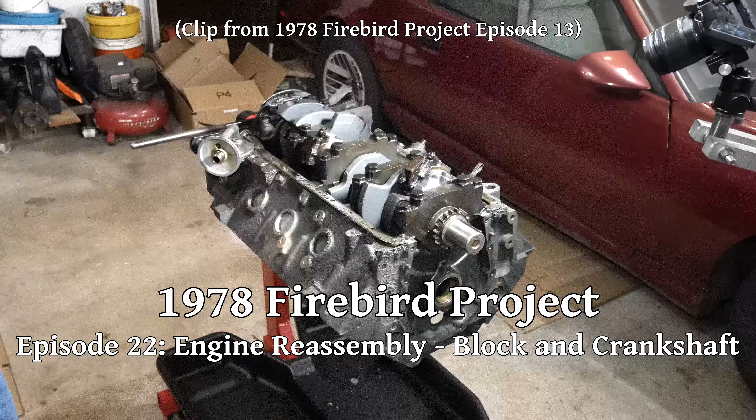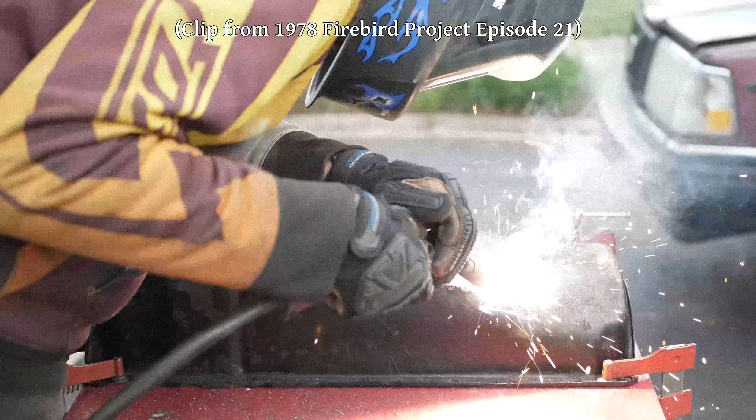This, incredibly, is the 10th episode of this 454 engine rebuild. Everything has been torn down, cleaned up, and the important parts have been gathered, so it's finally time to put the engine back together. Most of the parts are coming from an engine rebuild kit made by Engine Tech. This has new crank and rod bearings, piston rings, and most of the gaskets and seals we'll need.

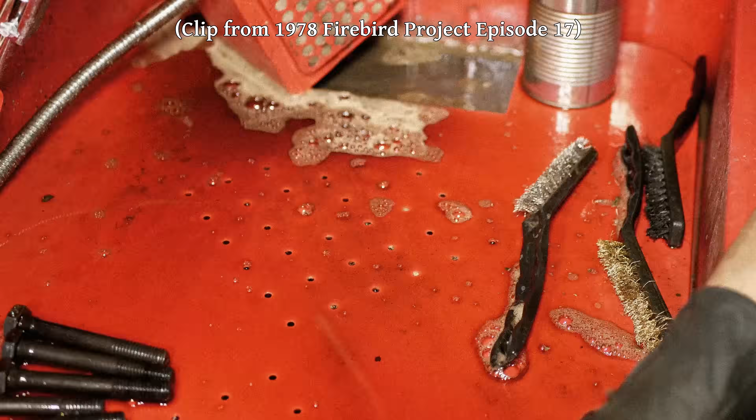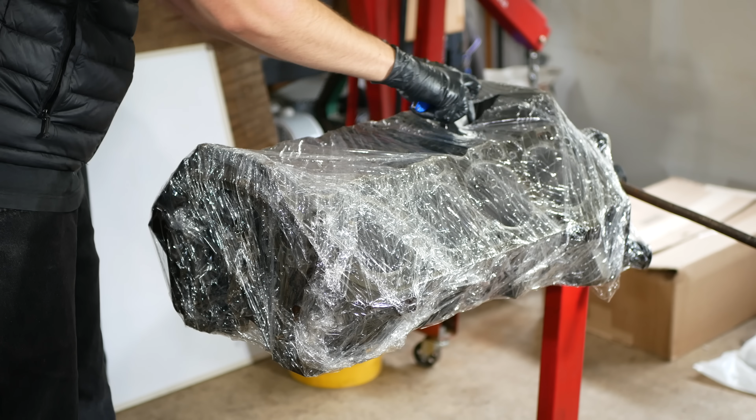And even though we cleaned a lot of the old ones, we still needed more bolts. So I ordered, well, a bunch, and it was not the last order that this project needed. We also have a handful of parts like a new timing set, oil pump, and cam and lifters. And with all of that on hand, let's unwrap the engine block and get to work.

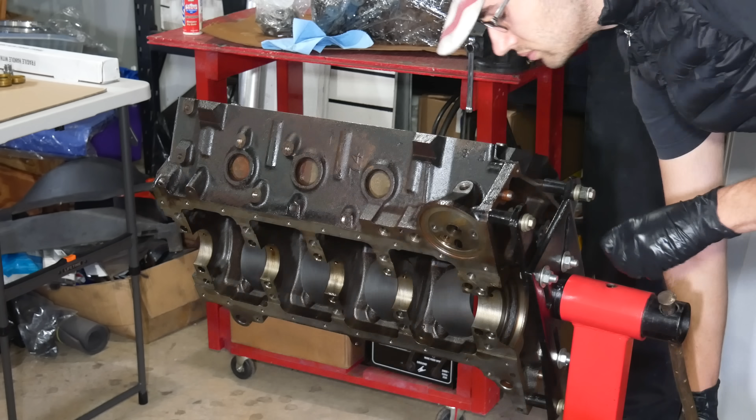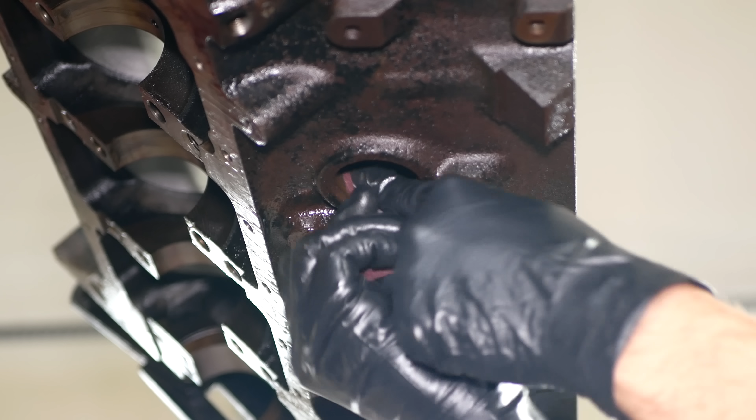The first thing we'll be doing is installing a set of new core plugs. And to do that, we'll rotate the engine so the ports for the first ones we'll be working with are facing down. But why? Well, I probably should have done this before washing the block, but we need to clean up the edges of the holes for the core plugs before installing the new ones. And I figured that in order to keep as many of those abrasive particles as possible out of the engine, if we just face the ports down, hopefully the particles will just fall back out.

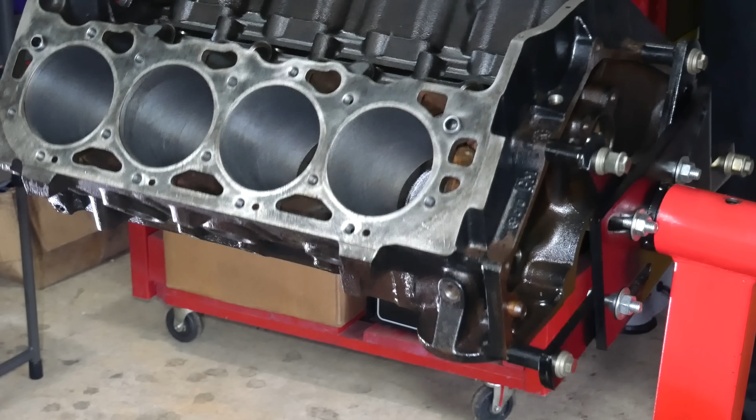There wasn't much rust or scale buildup on these at all, so some red Scotch-Brite should clean them up just fine. After that scuffing, we'll make sure to thoroughly clean them. And with that done, we can flip the engine onto its side where we can more comfortably install new plugs. Because I decided to use some sealer on the plugs, we want these ports free of oil, and some acetone on a shop towel will do that just fine.

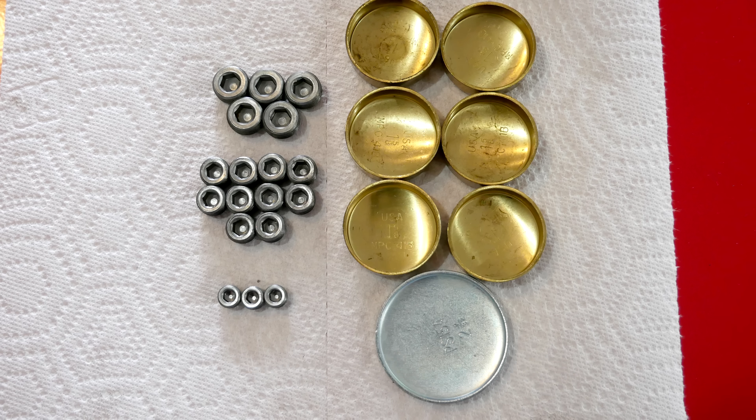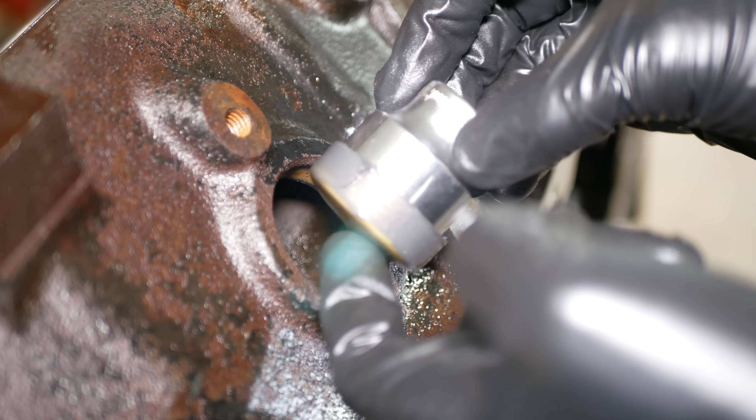We'll be installing a set of brass core plugs because I greatly prefer them to their steel counterparts. I really don't think sealer on these is necessary, but I figured it was kind of a might as well situation. We'll be applying just a little bit of regular old RTV to the plugs, and we'll set the first one in place. To punch them into the block, we'll just be using a socket, this one happens to be 1 1/8", and an extension to hammer them in.

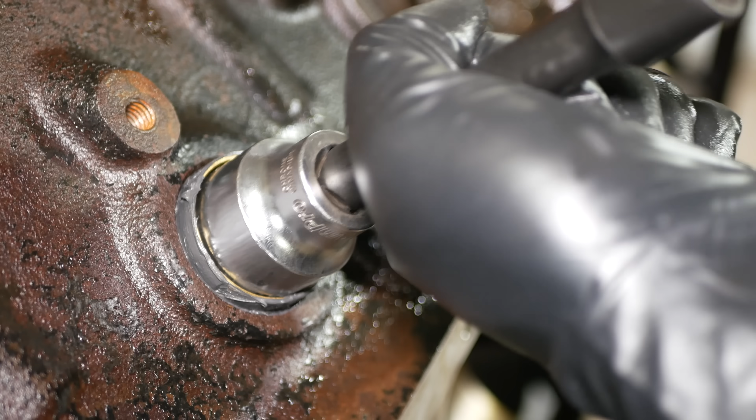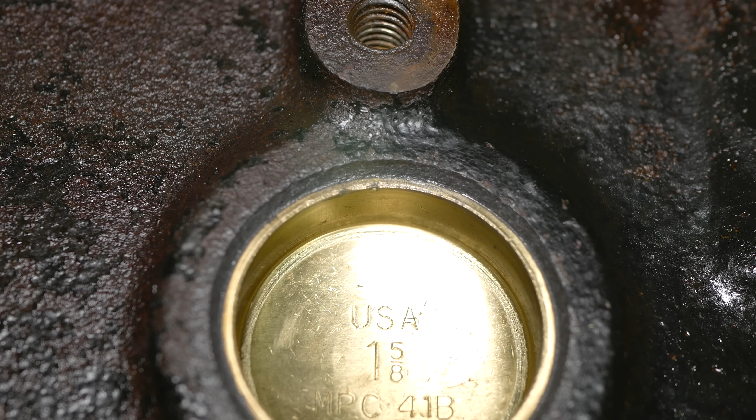The plugs need to go in straight, with the outer edge even and level all the way around. We'll set the depth of the plug to be even with the lower edge of the bevel in the engine block. And once it's fully installed, we'll carefully clean up any excess RTV on the outside of the block, mostly because it'll make the paint adhere to everything better later. We can double check that the depth is correct by peeking through the coolant port on the deck surface, and luckily that installed plug looks perfect.

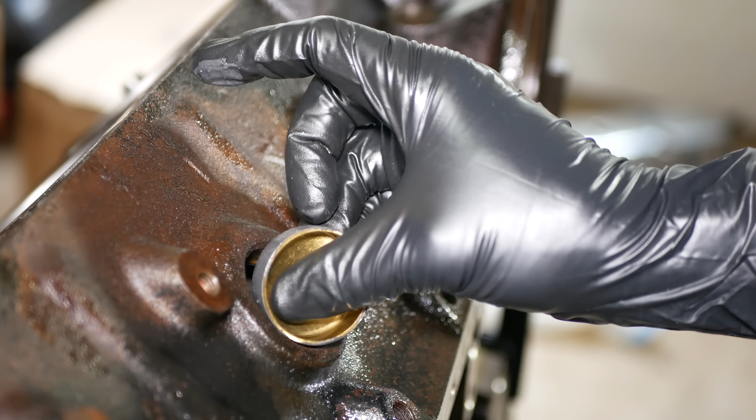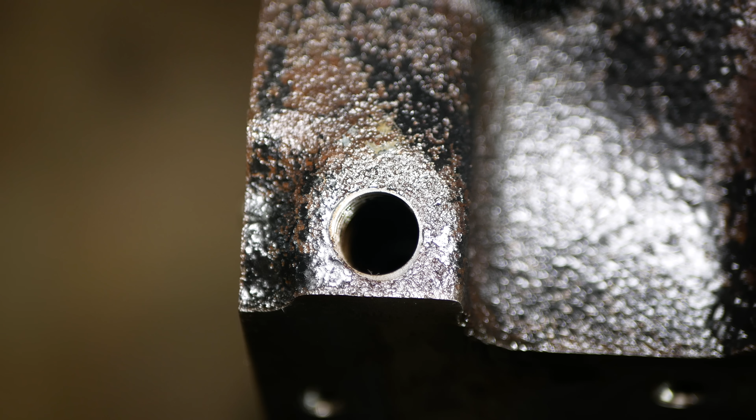So we'll keep moving on along, and the second plug on the driver's side will get installed in the same way. And after that comes the third. Those three are looking perfect. We'll use more acetone to wipe down the outer edges one more time in an effort to remove any remaining RTV. Then, while we're here, we'll take care of a few threaded plugs on the same side of the engine block.

The core plug set also included these new threaded plugs, which is what we'll be applying thread sealer to and installing. This first one will seal off the oil gallery all the way at the front of the block. We'll be tightening these NPT plugs by feel and kind of trying to align them in an aesthetically pleasing way. Once that's nice and tight, we'll wipe off the excess thread sealer and move to the next one.

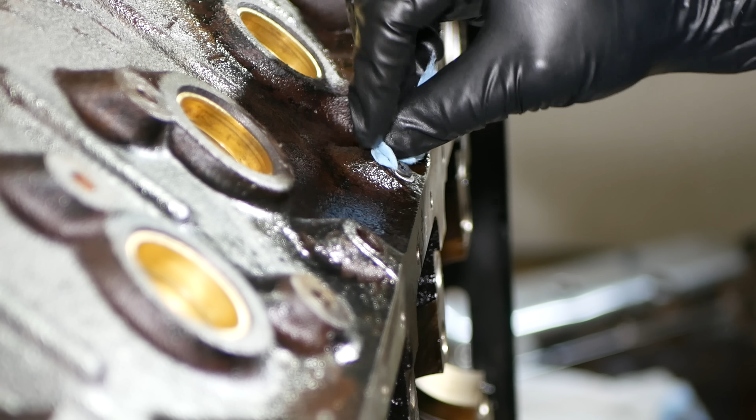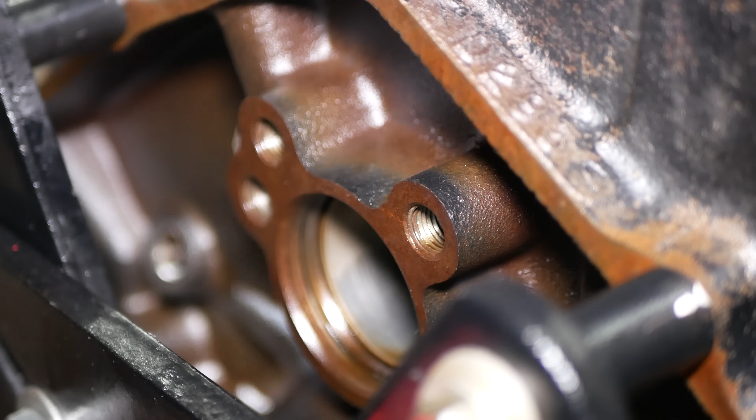This plug seals off the water jacket and doubles as a coolant drain for the block. With that installed, next is this threaded port right above the mounting pad for the oil filter. And that about covers the driver's side of the block. We'll rotate it once more and move to the rear. First, we need to install and tighten down plugs into the 3 ports above the cam tunnel. 2 of these feed the lifters and 1 feeds the cam bearings.

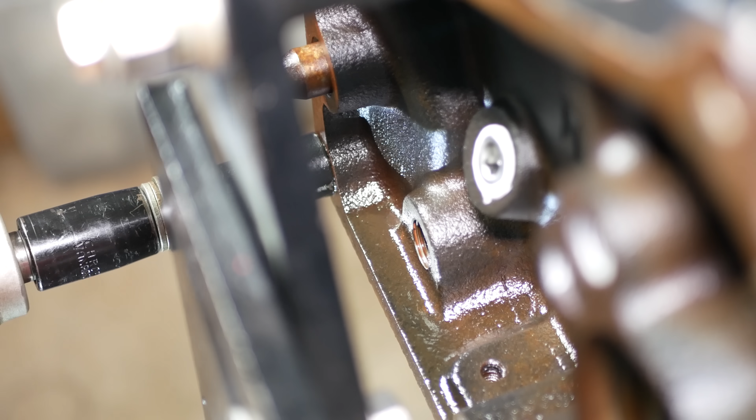We'll be able to see this better with the front plugs, but when installing plugs like these, you need to make sure that they won't tighten down too far and block any important ports. In this case, none of them are interfering with anything, so we're free to get them nice and snug. And once those are in place, we'll also cap off the 2 ports at the lower driver's side. In order to get the socket onto this lower plug, we need to loosen and swing out of the way one of the arms on the engine stand.

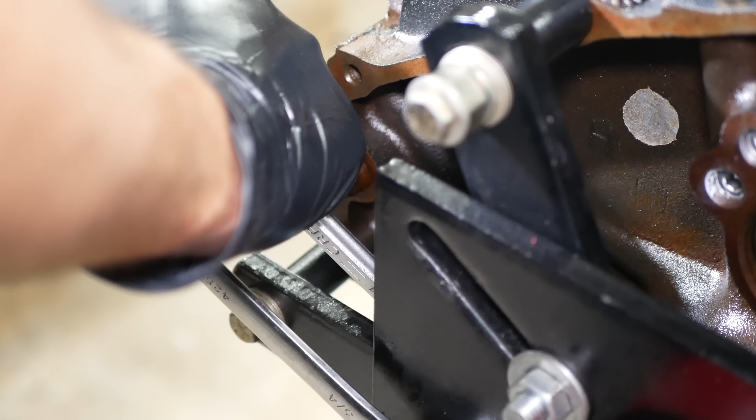Generally speaking, 3 out of 4 is still plenty to hold up an engine, but make sure the others are very tight and be careful if you have to do something like this. In our case, it didn't present any problems and gave the clearance that was needed to install that plug. And with that in place, we'll reinstall the arm for the engine stand, and there's just one more threaded port towards the rear of the block, this upper one which typically feeds an oil pressure sender or switch.

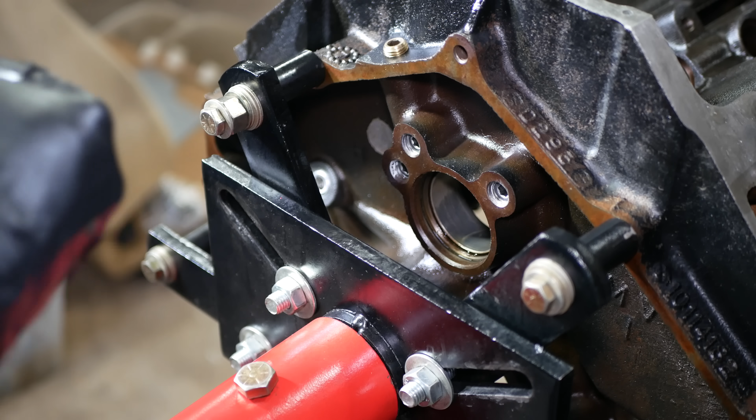We'll be using this port with a mechanical gauge during testing, so we won't be installing any sealer and we'll just install a temporary plug. With that, there's just one more plug to install at the rear of the engine block, and that's the large steel one that blocks off the camshaft tunnel.

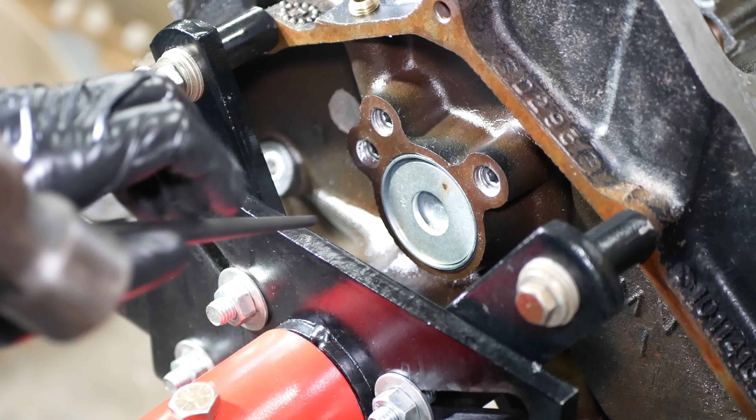Because of the block's positioning on the engine stand and my lazy unwillingness to remove it from the stand, installing this one will be a bit awkward. We'll protect the plug with a large flat steel washer and use a large punch to hammer it in. By continually moving our point of impact, we'll make sure the plug gets pushed in straight.

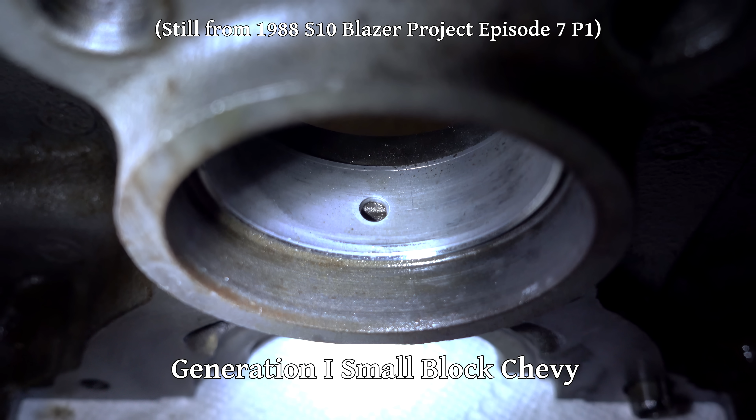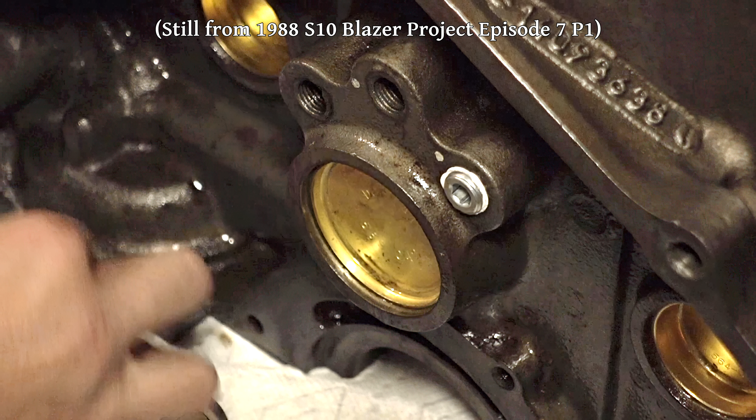This Gen 1 block has a little shoulder right behind the cam bearing, which is not something seen on earlier models. Because of that, I'm honestly not sure if it's possible to install this plug too far on this particular engine, and the factory installed plug was at least pushed in 1/8 of an inch past the bevel, but to stay on the safe side, it would probably be for the best to push the plug just as far in as you have to get it fully seated.

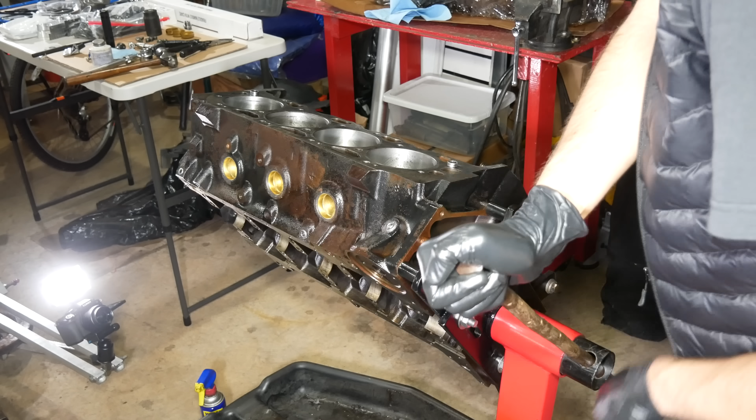I decided to install the plug similarly to the factory one, and once that looks about right, we'll flip the engine over once again and work on the core plugs on the passenger side. We'll face the 3 large ports down, just like on the other side, to clean them up. They'll get the same red Scotch-Brite treatment, and then, when the engine is flipped upwards, an acetone wash.

Then we'll give the first plug a light coating of RTV and knock it into place. Then the second, and the third. And with those looking just right, we have one threaded plug on this side into a coolant passage. And with that tidied up, this side is done, so we'll flip the engine back upright and move to the front.

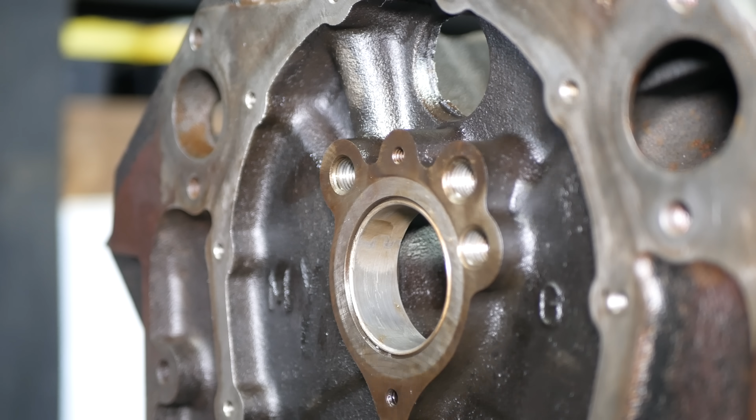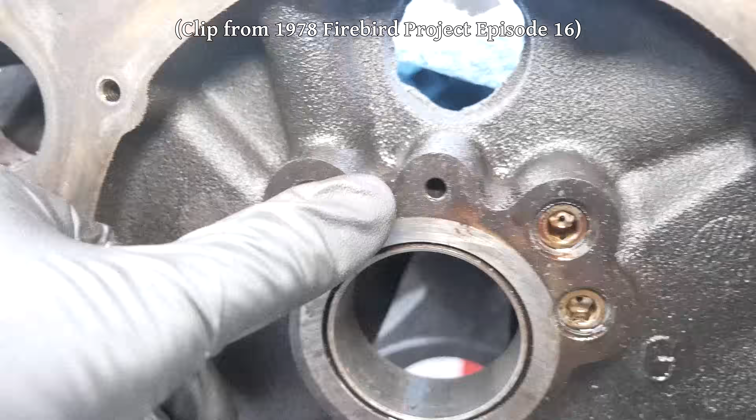Just like we did at the rear of the engine, the 3 ports around the cam tunnel at the front will need plugs. This was talked about when taking the engine apart, so I won't belabor the point, but the plugs we'll be installing are solid ones. The plugs that came in this engine are drilled down the center to help prevent noisy valve train startups by evacuating air. They also provide additional lubrication for the timing chain.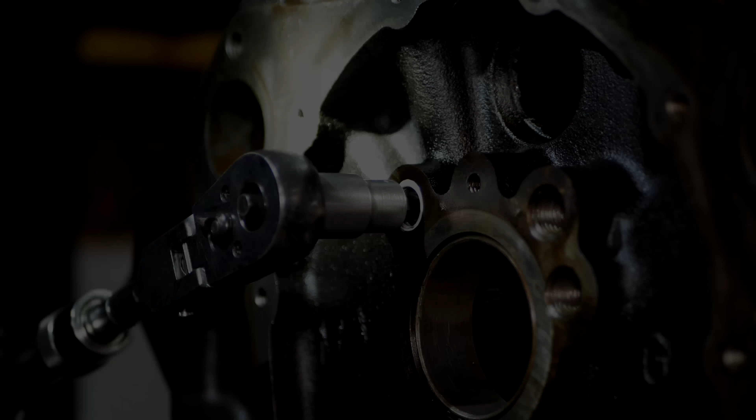I ended up going with regular old solid plugs because that's what the new kit came with, and I may have lost the old ones, but let's not dwell on that. Older engines didn't have drilled plugs, and it doesn't seem like something I need to be too concerned about, so we're just gonna stick with the solid ones.

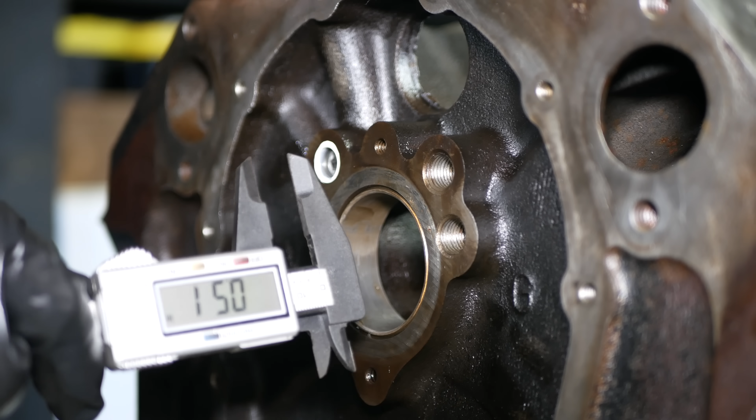At the front here, we'll also take a better look than we could at the rear at the cam bearing oil passage. Here you can see how the port for that front cam bearing is in the threaded section of this gallery. This is why you need to be careful which depth the plugs are installed to. The best way to check for this is to measure the depth of that port, the thickness of the plug, and then measure the plug's depth once installed.

In this case, that oiling port was about 1/2 inch from the front of the block. After calculating for the plug thickness at the base of the hex, that first installed plug is blocking threads all the way down to 0.52 inches. And once the other 2 are installed, they check out about the same. That depth means that the plug is up against the port but shouldn't be blocking it.

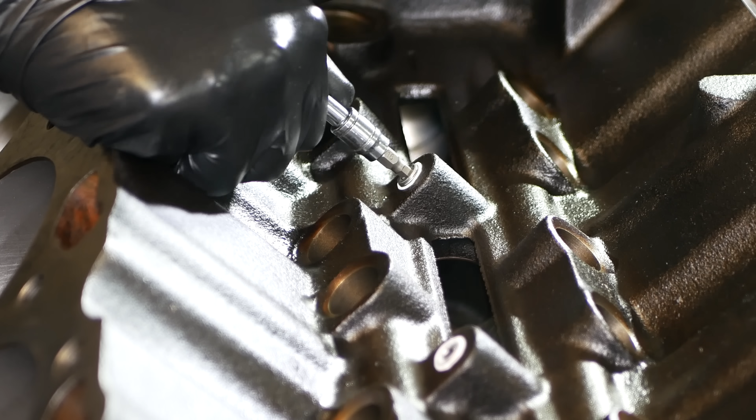And with those sorted out, we can move to a few plugs in the intake valley. This trio of 1/8 inch NPT plugs seals passages that had to be drilled down to those center cam bearings to feed them. So we'll make sure to get each of the 3 tightened down with care, and we'll flip the block totally over to work on the base of it.

First, we'll thread plugs into these 2 ports, which would normally be used for an external oil cooler. We won't be running one of those, so we'll just block them off. And there's a little side note about that that only occurred to me after putting the engine together, so it's something we'll have to take care of in the future.

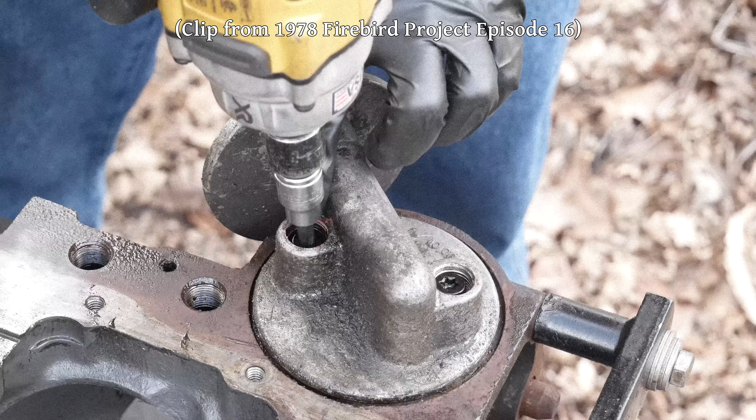Back in the engine block disassembly video, we showed that there were 2 oil pressure relief valves built into the filter mounting pad. The valve offset from the center will keep oil flowing in the case of a clogged oil filter, and this valve in the center is the oil cooler bypass.

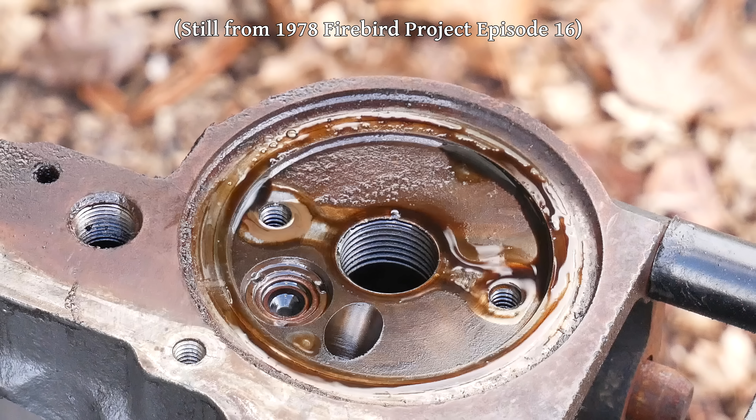Since we just plugged the ports for the oil cooler, that means all of the oil flowing through the engine will be going through this valve. And it's not necessarily the biggest problem, but it's not doing us any favors, and it's an additional element of complexity in the system. Before starting the engine, we will circle back to remove that valve, but for now we'll just continue with chronological engine assembly, and the next thing we'll do is install the oil filter adapter.

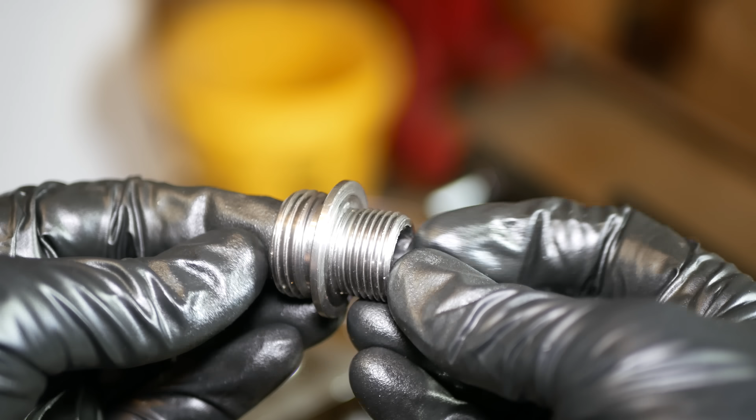This engine came with an offset adapter to help oil filter clearance around some components that we won't have to worry about. So instead we'll be using this standard style of oil filter adapter that just allows a filter to be screwed straight onto the block. It's probably unnecessary, but we'll put some thread sealer on that and use a hex socket on the inner diameter to tighten it into the block. I wasn't able to find a torque spec for this, so we'll just get it tight.

That covers all of the plugs and that adapter, and we're finally ready to move to some of the bigger parts. Before we get any farther, we'll use some more acetone to thoroughly clean all of the cylinder walls. This always manages to get even more out of cylinders that were already looking pretty good. We'll run a shop towel around each cylinder until it comes out clean. Obviously, we don't want any grit in there for when the pistons go in, but before we get to that, we're going to be doing some measuring, so we want the cylinders as clean as can be.

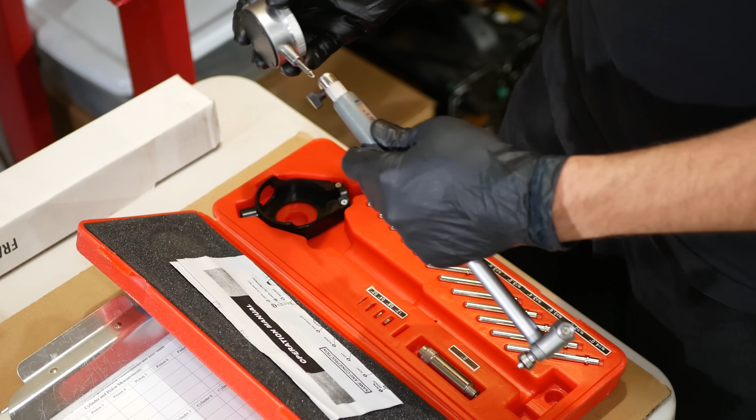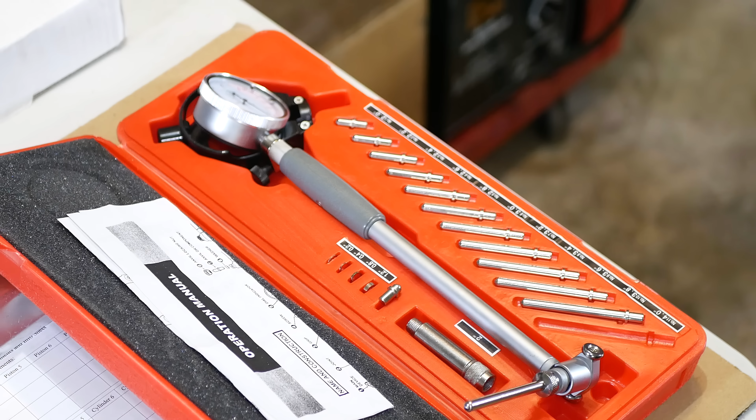To help keep this data organized, I made these printouts specifically for this engine with data separated into a few different tables. To help us fill those out, I bought this tool, a dial bore gauge. We'll be able to use this to get some accurate dimensional data about the cylinder walls. Normally this is something you would do before you're actually assembling the engine, but in this case, I wasn't really gonna do anything about this data unless it was way bad. This is more something I wanted as a curiosity to see exactly how bad the cylinder walls ended up after all of that honing.

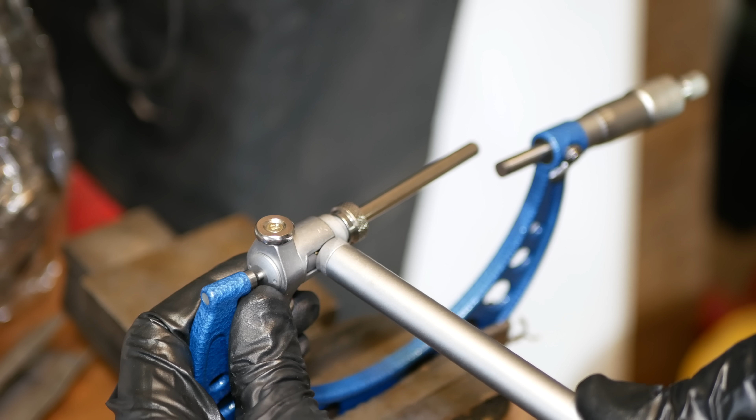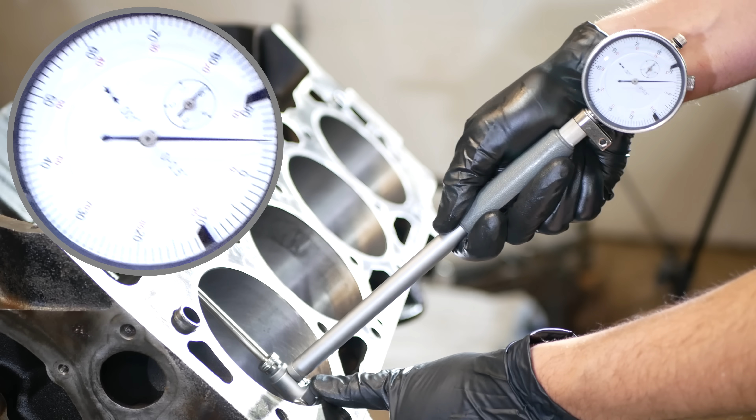To take a reading with that dial bore gauge, we first need to set it up using a micrometer. This one is lightly clamped in a vise and locked at the measurement of 4.250 inches, which should be the starting point for the inner diameter of the cylinders. We'll zero out the gauge to the micrometer, which means its 0 represents 4.250 inches. With it set up, we can carefully insert the gauge into a cylinder and take an accurate reading of its diameter at one location. Here we're measuring towards the top of cylinder number 1. By rocking the gauge back and forth, we'll look for the lowest reading, which represents the actual diameter at that point. That measurement in the direction of piston travel came out to 4.254 inches.

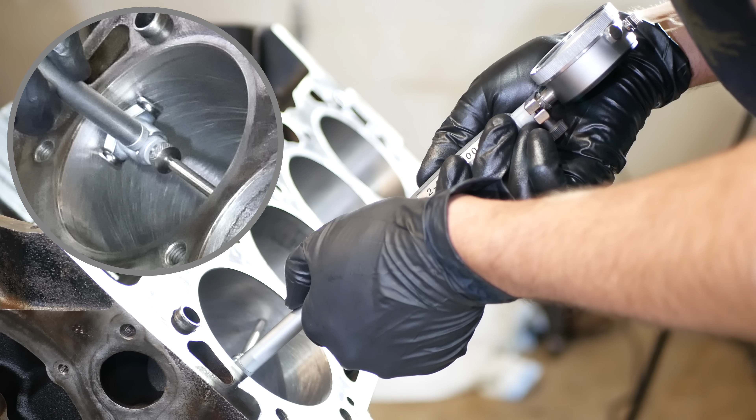And if we measure perpendicular to that, where there's usually a little bit less wear, we come out with 4.252 inches. Then we'll once again measure in line with the piston travel, but this time towards the bottom of the cylinder. Typically, this wears less than the top of the cylinder and came out to 4.252 inches. Perpendicular to that, it measured at 4.251 inches. That covers one cylinder, but of course there are a few more. We'll measure each and every cylinder in that engine block the same way we just showed measuring cylinder number 1. The numbers turned out pretty much as expected, and we'll go over those in just a minute.

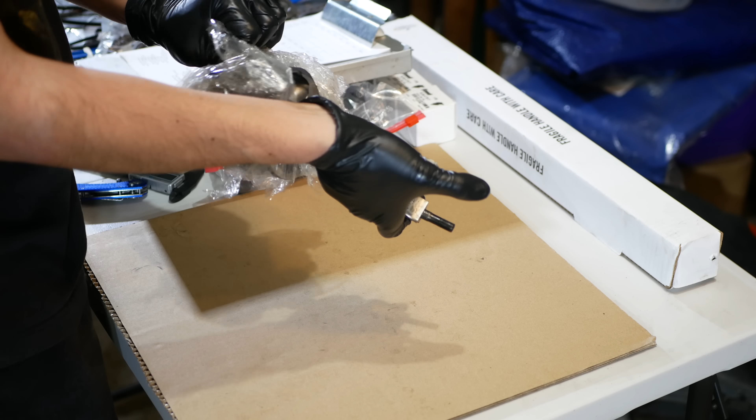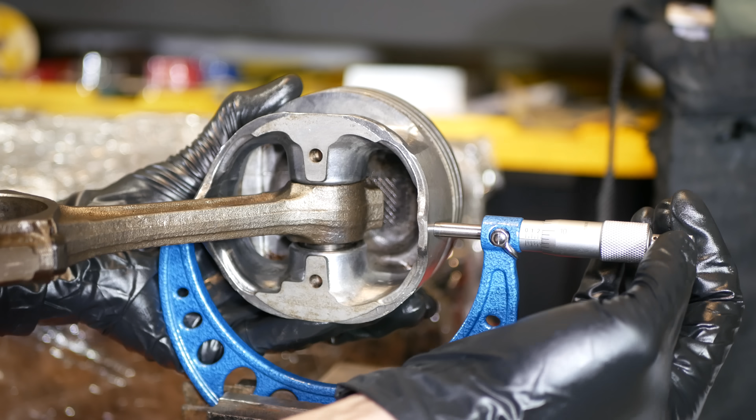But what are they actually telling us about this engine? Well, there's one more thing I want to do before we talk about that, and that's measuring the pistons themselves. Let's go ahead and unpack those and lay them all out on the table. We'll take the piston from cylinder number 1 and use that same micrometer to measure the skirt diameter. Typically, the widest part of the piston is the base of the skirt, and we see that here with it measuring 4.248 inches. In fact, we measured all of the pistons and they all came out to that same number. So now that we have that in addition to the cylinder measurements, let's look at the numbers for a second.

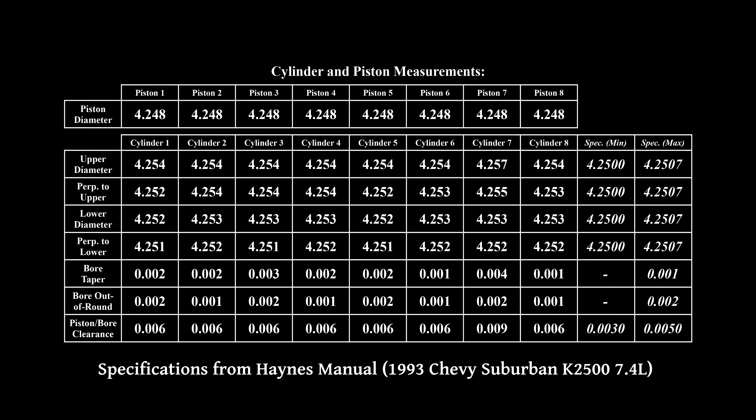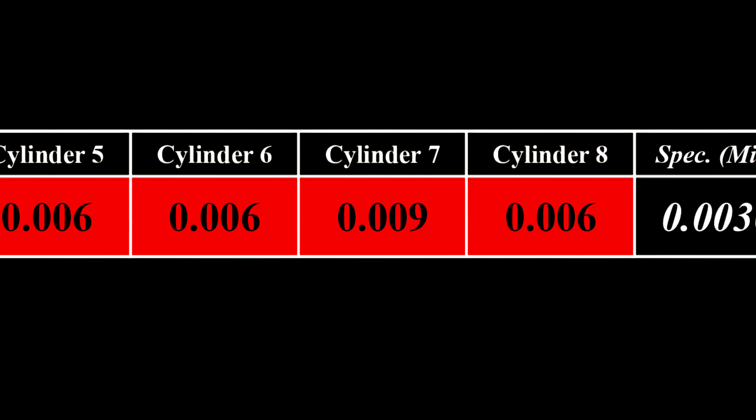There are a couple of critical values here, and the first one is just the plain diameter of the cylinder. And surprise, surprise, every one of our diameter measurements is outside of the range of the factory specification. But the more important real-world number is the piston to bore clearance. And if we look at the difference between the piston diameter and the largest measured diameter for each cylinder, we come out with 0.006 of an inch for most cylinders and 9 for number 7. Again, all of those are outside of our specs, but the 6s are pretty close. That 9, though, is actually abysmal.

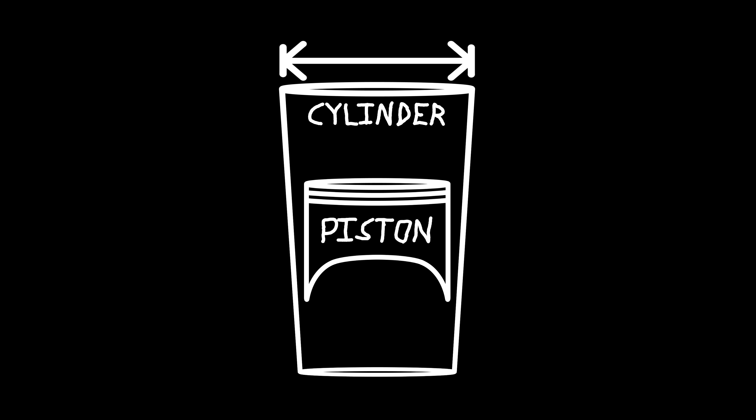Another critical measurement is the amount of bore out of round. That's what that perpendicular measuring of the cylinder was telling us, and it comes out to 0.002 of an inch. That value is the upper listed limit for out of round, but our measurement is within that spec. The last big one that we'll talk about here is bore taper. That's the difference between the measurements at the top of the cylinder and the bottom.

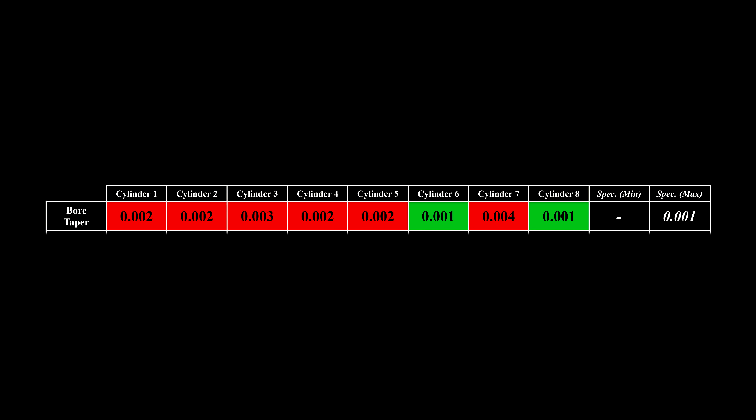Cylinder to cylinder, the calculated taper varies from 1 to 4 thousandths. Only 2 of them failed to surpass the factory specified limit of just 1 thousandth. And once again, cylinder number 7 is just embarrassing me. That's causing a lot of movement of the piston rings and is likely to wear things out pretty quickly.

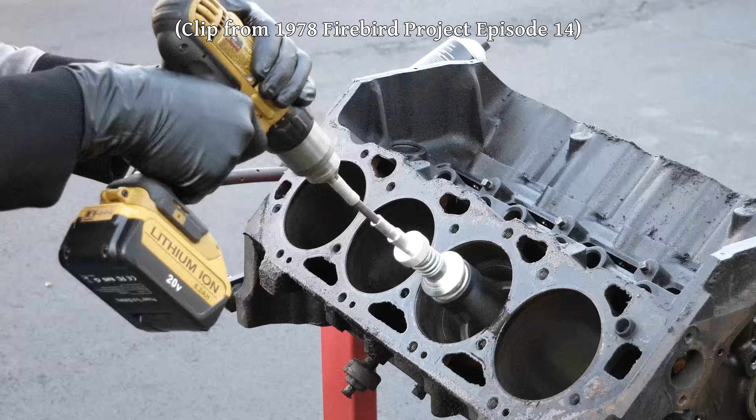But at this point, in the name of budget and experimentation, we're already pretty committed to doing some questionable things with this engine build, so we're gonna keep moving forward. Though unfortunately, that means a bit more measuring before we get back to assembly. Next, we'll be checking out the main journal diameters of the crankshaft.

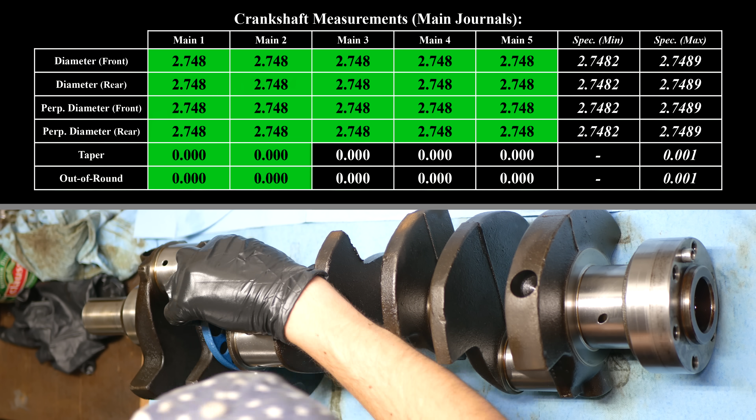The listed range for journal diameters is 2.7482 to 2.7489, so all of these should be right inside of that range. There was also no out of round that I was able to measure on any of the journals. So what about the rod journals?

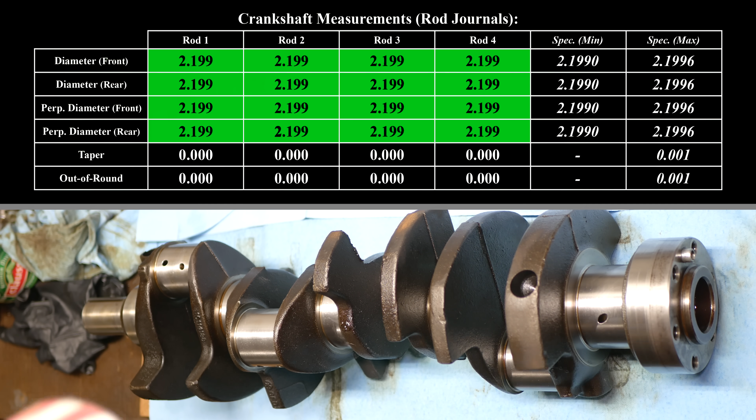We measured each and every one of those at more than one position and they all came out to 2.199 inches. The listed range is 2.1990 inches to 2.1996 inches, so as closely as I can measure, they are all right in that range. They also show no signs of being out of round. As it turns out, the crankshaft is just about the most perfect part of this entire engine.

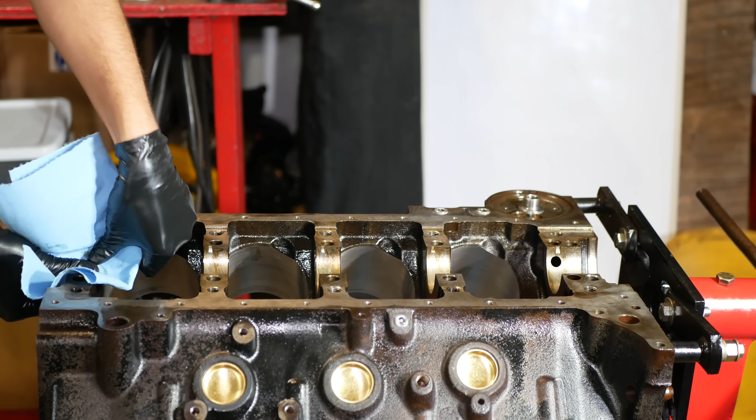Which is great and all, but none of that's very helpful if the actual bearing clearances aren't any good. So we'll step back from the numbers for a minute and get back to the engine block. With it flipped upside down, we'll take brake clean to each of the main bearing saddles and the main cap mating surfaces. We want all of these surfaces dry and very clean.

It's also time to unwrap all of the main bearing caps that we cleaned, and crack open the pack of new main bearings. These are standard size bearings, just like the ones that came off of the engine, and they should be a perfect fit. Just like we did for the engine block side, we'll use brake clean on each of the main caps to remove any oily residue. The only thing left on these is that thin coating of WD-40 we left on them, which is very easy to remove.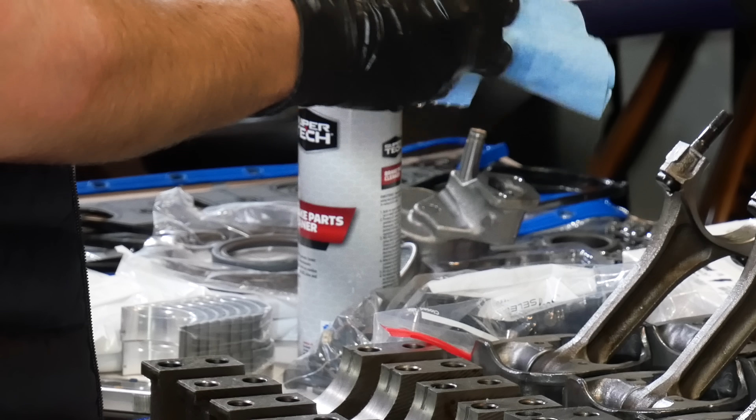We'll also use brake clean and shop towels on both surfaces of the new bearings. It's sometimes surprising how much will come off of the surface of those clean looking parts. And once there's no more residue coming off of each one, we'll start putting the bearings in the main caps. The large bearing with the thrust surfaces goes on the rear cap, and for each of the others, all we have to do is line up the tang on the bearing with the slot cut into the cap. Each bearing should press down into the cap by hand and should be a nice snug fit.

And once all 5 of those are in, we'll do the same thing on the engine block. That wide bearing presses in at the rear of the block, and each of the others slots in, once again making sure the tang is where it needs to be. Of course, it's also important that the oiling holes in the bearings line up with the ports in the block, and luckily they all do.

Once those are in place, we'll go grab the crankshaft and very carefully lower it into the block. We won't be putting any oil on anything just yet because we're going to take a measurement. We'll be checking bearing clearances with Plastigauge, these little wax strips that we'll place on each of the main journals. And once all 5 of those are in place, we'll start dropping on the main caps. First up is the rear cap.

We'll be using this mallet to help persuade the caps into fully seating. We'll get the 4 smaller caps into place, making sure they are installed in the correct order, and then give each one a few taps until it is fully seated up against the block. And once all of those are in place, it's time to dig out the main cap bolts. Once we have those ready, we'll apply oil to the threads of each bolt as we drop it into place.

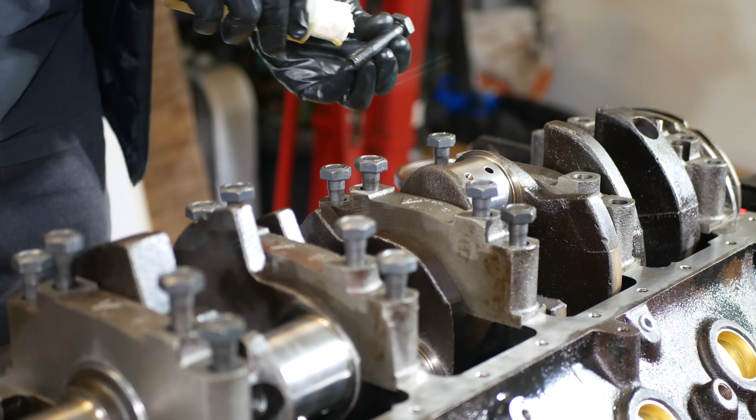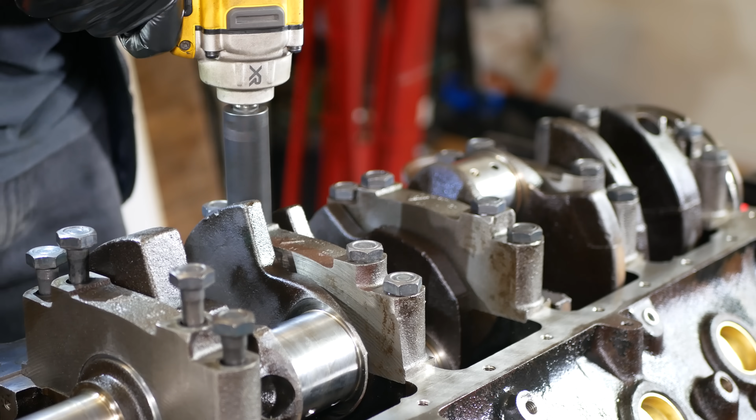Of course, the shorter bolts go on the outside ends of the caps, and the longer bolts go towards the center. Once all of the bolts are in place, we'll go back through and put a drop of oil underneath the head of every single one. This, and the oil on the clean threads, ensures a consistent and repeatable amount of torque when tightening, which is the next step. First, we'll go through and snug down all of the bolts, just looking to get them threaded in. Some spots, like this cap on the end, might need a little bit of persuasion to get the bolts perfectly lined up. And with all of those snug, I am lucky enough to have the opportunity to go through and start torquing the caps down.

First, we'll do a pass on each and every one of the bolts at 30 foot-pounds. We'll follow a standard 4-bolt main torquing sequence, which involves starting at the center 2 long bolts and working out in a spiral. Then, once we get all the way through, we'll tighten the 2 center short bolts and work our way outwards in a spiral once again.

And once all of the bolts are at 30 foot-pounds, we'll go over them again and do 70. And hooray, we get to do it again, this time at 102 foot-pounds. I am very glad to have this relatively long-handled torque wrench for this. Once we're finally done with that pattern, we can stand back and admire our work. For about 10 seconds, because now we have to go through and take all of those bolts back out.

We'll follow a standard detorquing sequence, which is the reverse of the sequence we just followed to tighten them down. Then all the bolts can come out, and we'll use 2 of the long ones to very carefully rock loose each of the main bearing caps. I emphasize carefully because we don't want to squish or move the wax strips in any way that might distort them. And we definitely don't want the crankshaft to turn during this process.

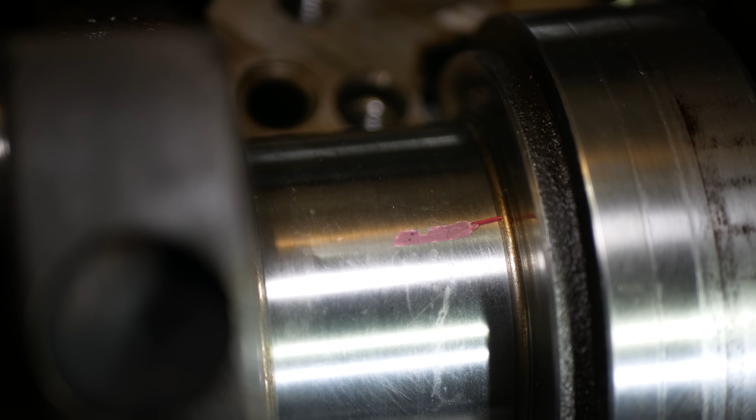Once again, that rear cap really didn't want to go anywhere, and it took some hits from the mallet to remove it. It seemed like everything came off cleanly enough that we were able to get good information from the Plastigauge. All of the wax strips are still there, squished against each of the journals, and pretty uniform in size. The rear one still has half of it stuck to the bearing cap, probably because it was so hard to dislodge it. We'll measure the width of the wax streak left on each of the crankshaft journals.

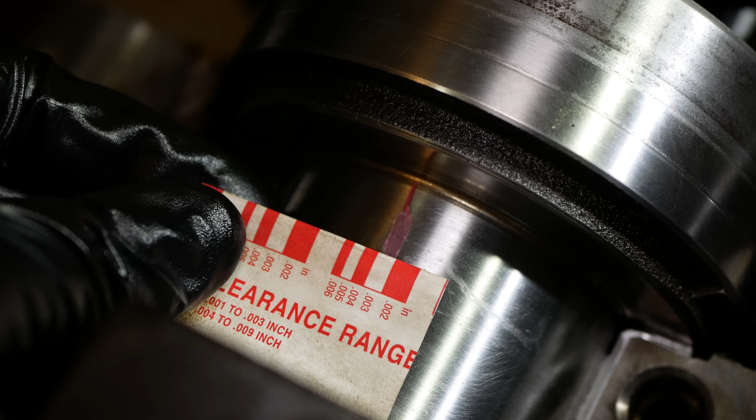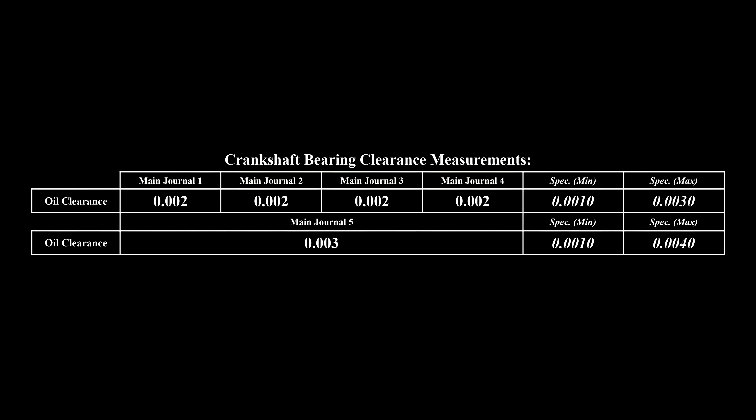The first 4 come out to 0.002 inches, and the 5th journal comes out to 0.003 inches. Specs for main bearing oil clearances for the first 4 are between 1 and 3 thousandths. That 5th wider bearing usually has a bit more clearance, and the spec is 1 to 4 thousandths. So as close as we can measure, all of these clearances look absolutely perfect. Which means it's time to install the crankshaft for real.

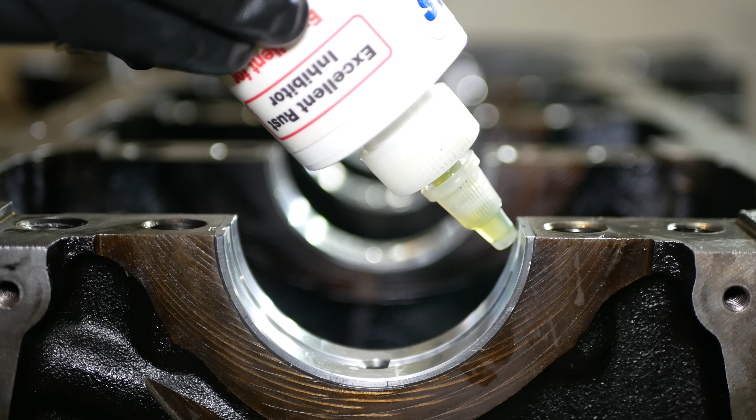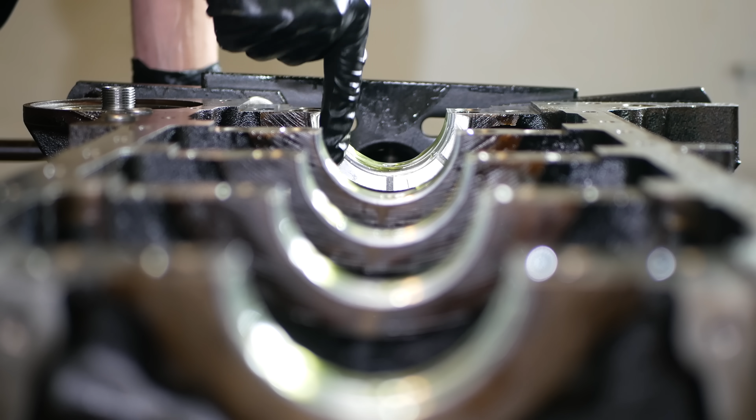We'll go ahead and wipe the Plastigauge off of the journals, although it's not strictly necessary, and lift the crankshaft straight up and out of the block. We're taking that back out so that we can coat the bearings in assembly lube. This stuff is extremely tacky and will stay where you put it, even as we rotate the crankshaft during reassembly. We'll make sure each of the bearings and the thrust bearing surface are thoroughly coated. And we'll do the same for the other halves of the bearings that are installed in the main caps.

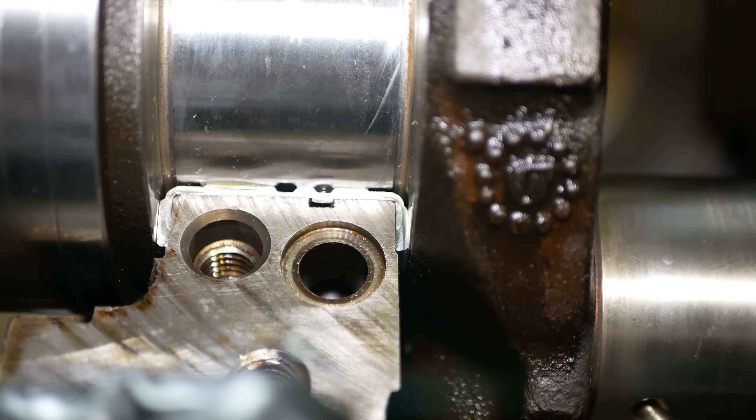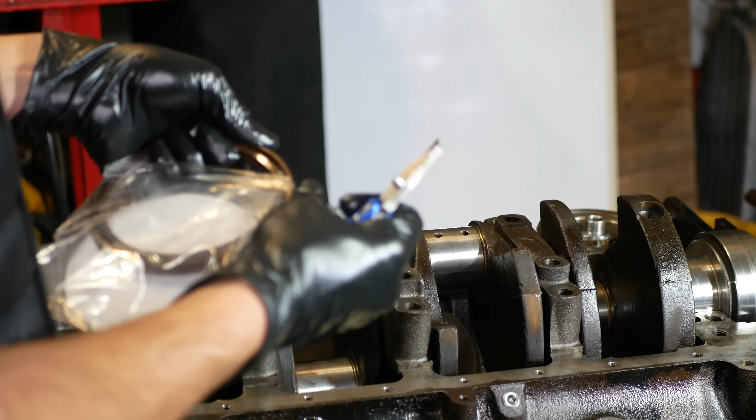Then, for hopefully the last time, we can drop the crankshaft back into the block. And just like before, we'll slot in the first 4 main caps. Before we put on the rear cap though, there are 2 things we're going to take care of. The first is this little O-ring that sits underneath the cap on the block side. I believe this is only a Gen 5 and 6 thing, but it helps seal the unfiltered oil going through that main cap. And with that in place, we're also going to install the rear main seal.

Doing it before the main cap is in place is probably a little controversial, but I figured it would be easier this way. We'll slip the oiled seal over the rear of the crankshaft, and then we can drop on the main cap. We'll seat it with the mallet just like before, this time also making sure that the seal isn't pinched in the process, and proceed to seat the rest of the caps.

The torque procedure will be exactly the same as last time, so we'll speed through it. The oiled bolts are placed in the caps. All of them get snugged down, and the crank gets pushed forward and back to set the thrust bearing, and we'll torque them all to 30 foot-pounds, then 70 foot-pounds, and finally 102 foot-pounds. And with that last relieving click, the crankshaft is fully installed.

Of course, before we go any farther, we need to make sure it turns easily. The only felt resistance to turning seems to be from the thick assembly lube, so I think we're in good shape. And with that, while it may be a little anticlimactic, we will be ending the episode here. This time around, we covered a lot of the detail work and measuring, and by the end of the next episode, we should have a complete long block.